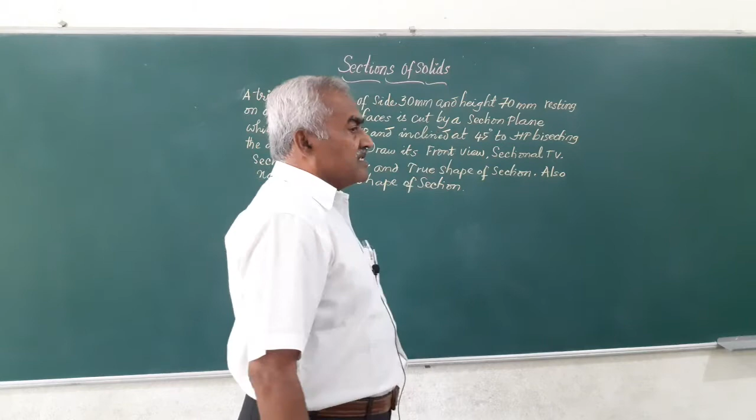So friends, in today's session I am going to explain how to obtain the section of a triangular prism. Basically in the sections of solids, you need to know exactly how to place the object initially. That is very important. Generally, when you do not place the object properly with respect to VP and HP, you do not get any marks at all. So you should first of all learn how to place the object.

In general, whenever any of these prisms are placed on HP, one of the sides, the shorter side, is kept perpendicular to VP, such that this side comes to your left hand side or a corner comes to your right, or it could be placed this way also depending on the problem.

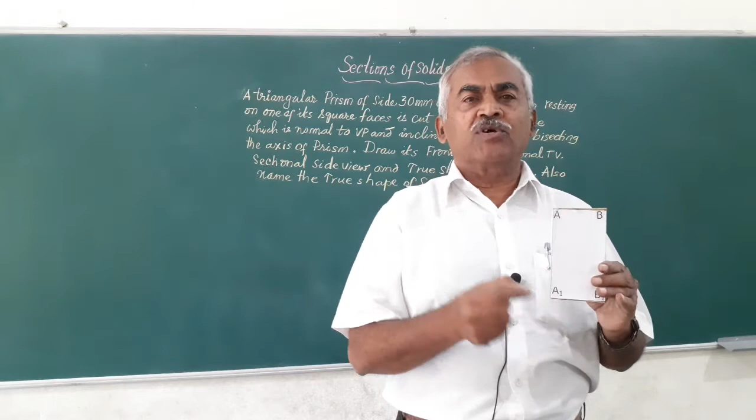So friends, before I take up the actual problem, let me explain about this triangular prism. In a triangular prism, as the name indicates, it has two triangular faces, one at the top and one at the bottom, and they will give you the size of this. Remember, in a triangular prism, these two are equilateral triangles. The center of the top face and the bottom face, one is called O, the other O1, and the imaginary line connecting these two is called the axis of the solid.

Friends, any prism is surrounded on its lateral surface by a number of rectangles. A triangular prism will have 3 rectangular faces on its lateral surface, and the side of that rectangle will be the side of the triangle, while the height is given by the height of the axis or height of the solid. Similarly, a square prism will have a square top, a square bottom, surrounded by 4 rectangles. A pentagon will have 5 rectangles, a hexagon 6 rectangles, and so on.

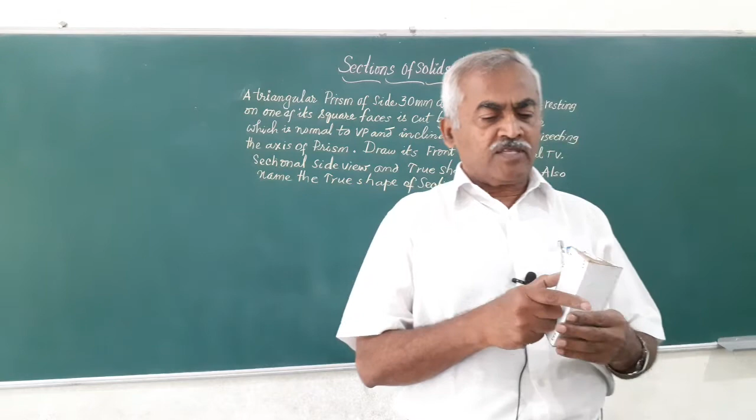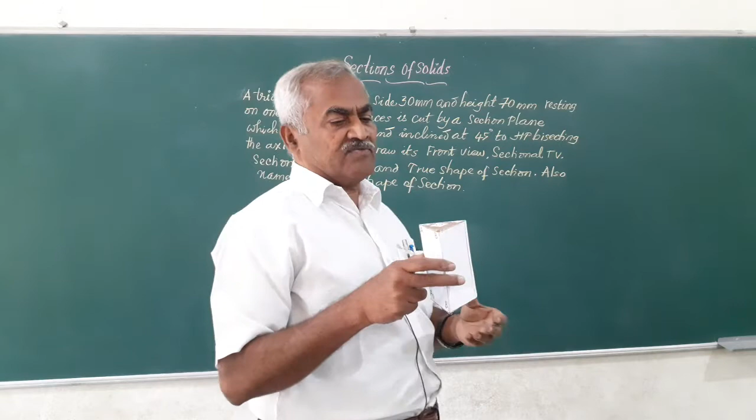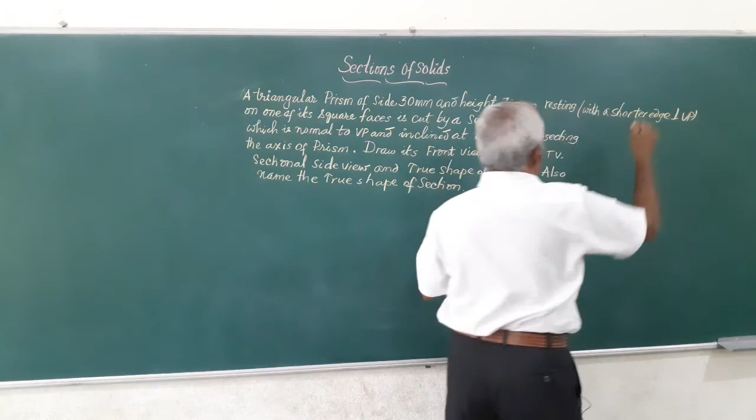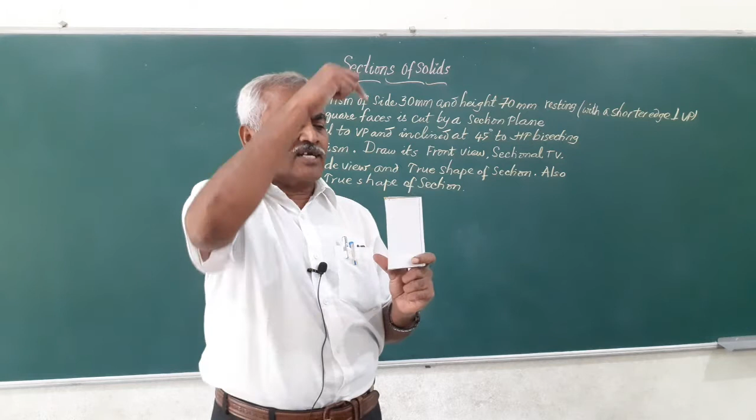So friends, let us see what happens when this is cut by a section plane. Basically you have to keep the object such that one of the shorter edges is perpendicular to VP, and obtain its top view and front view. In the top view you see an equilateral triangle of side 30 mm, and in the front view you will see this rectangle. The bottom triangular face is covered by the top face, so you only see one triangle in the top view.

Now friends, it is cut by a section plane, all these details are given. So let me start this problem by drawing the initial front and top views of the solid.

Let me draw to start with the initial position of the solid. I just mark this xy line representing the intersection of VP and HP. So I will mark it as xy, the line of intersection of VP and HP, and write VP over HP, indicating the first angle projection. So I am solving this problem using first angle projection.

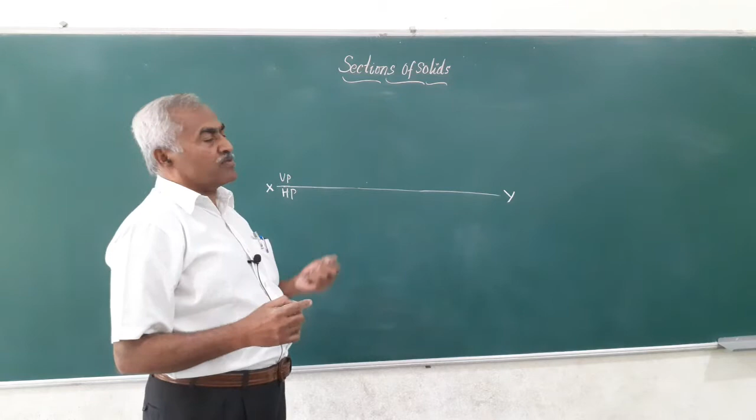Friends, they have given us a triangular prism, and the side is also given to us, so the side of this is 30 mm, and we can just mark it. All the sides are 30 mm. I will just mark it as A, B, C, and I locate the center by bisecting any two adjacent sides like this. You get O, the center of the top face, and O1, the center of the bottom face.

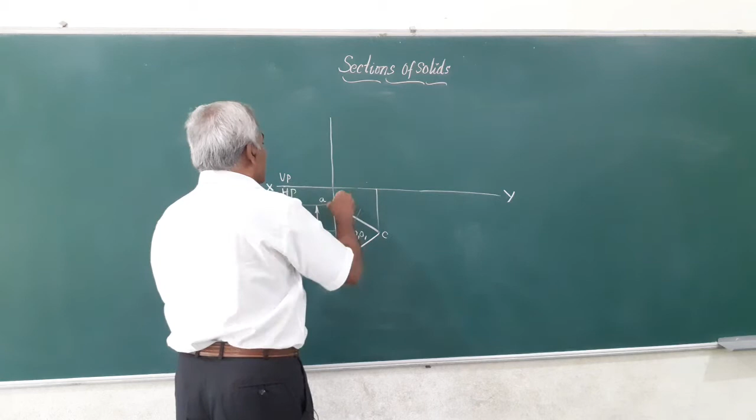Friends, from here in the front view I showed you, you are getting a rectangle, so I will just draw a rectangle here. The height of this rectangle is equal to 70 mm. So I have drawn the front view and top view of the triangular prism, in which one of the shorter sides is perpendicular to VP, and I have got the front view and top view of this solid.

So this is O dash and O1 dash, the center of the top and bottom faces. Let me see how to mark them. Friends, marking is also very important, and if you go wrong in marking, you will not be able to get the section points properly.

So friends, I will just start with marking A, B, C, the three sides. After marking in the top view, I go to the front view and mark this corner as A dash, B dash, and this is C dash. So A, B, C, A dash, B dash, C dash. Similarly, for the bottom face, mark this as A1 dash, B1 dash, C1 dash. Then coming back, these will be the longer edges AA1, BB1, and CC1. Friends, we have marked all the corners and the heights of this object.

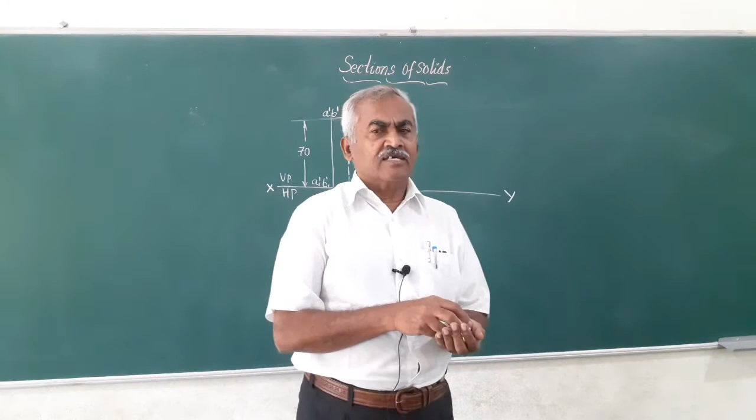Now it is resting with one of the sides AB perpendicular to VP. And now we have to mark the cutting plane or section plane. The question says the solid in this position is cut by a section plane which is normal to VP, meaning perpendicular to the board, bisecting the axis, meaning it divides this axis, which has a height of 70 mm, into two equal parts. So this is going to be 35 mm, 70 by 2. And the section plane should pass through this, cutting the solid.

So I am going to draw a line here, passing through this point, inclined at an angle of 45 degrees to the horizontal. So this is how I mark the section plane SS. Friends, this is making an angle of 45 degrees with the XY line or with the HP. After marking, whatever procedure I am telling, it has to be followed in the same way.

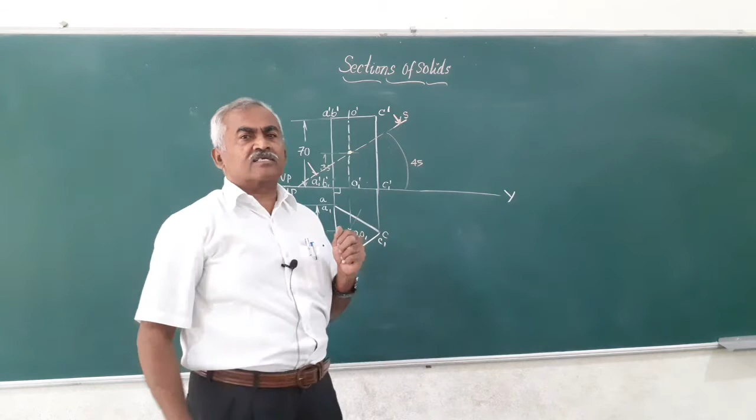After getting this, let us see what portion of the solid is thrown out. Once the solid is cut into two parts, the upper part is thrown out and you are left with only the part below the section plane. So I am going to darken the part that is retained for the purpose of the section, shown in color.

Friends, let us see which points the solid is cut by the section plane SS, which is bisecting the axis of the solid, cutting the two longer edges AA and BB at this point. CC is cut at this point. Now we have to obtain all these points in the top view to get the sectional top view. This longer edge is AA and also BB, so both are cut here, giving you a point for A and a point for BB. And the same line for the CC longer edge gives one more point.

After obtaining these points, whatever points you have got, you have to name them either in clockwise or anti-clockwise order. So I am going to mark this as 1, this as 2, and this as 3. After marking here, go to the front view. This is 1, 2, and this is 3. They should tally.

Friends, after joining all this by straight lines, I am going to hatch or section 1, 2, 3 by lines drawn at an angle of 45 degrees to the horizontal, providing a spacing of around 2 millimeters. So friends, here we have got a sectioned part in the top view, and we call this the sectional top view, because we have sectioned the top view here.

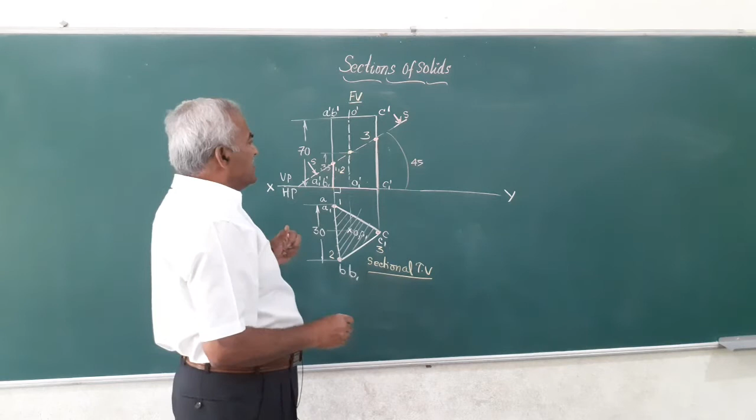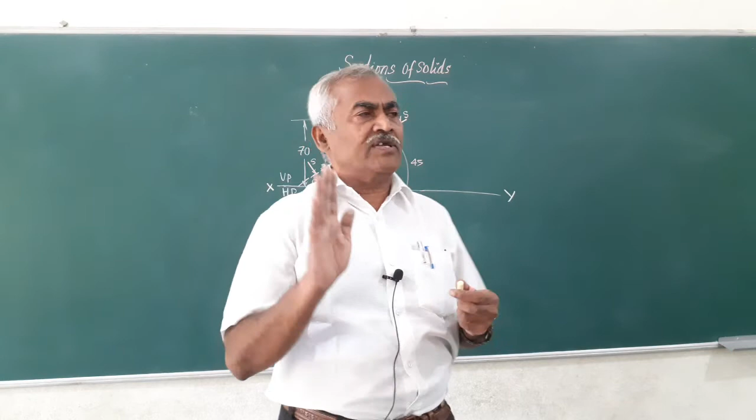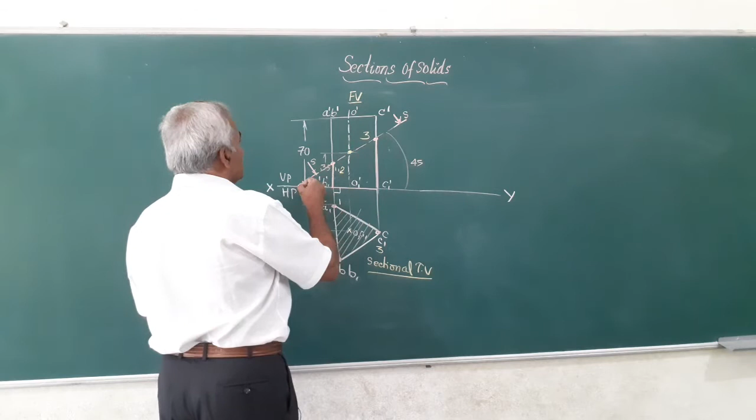Now friends, after these two, we have to obtain the true shape of the section. What is the meaning of true shape of the section? It is nothing but a photocopy of this cut section, or a mirror image of this section. What is to be done for that? It is very simple: we are going to draw a line parallel to SS at any convenient distance, depending on the place available. So friends, I am going to draw a line here.

This line is parallel to SS, and I am going to draw perpendiculars from all these points, point 1, point 2 and point 3. So I am going to draw another line to this point. These lines are parallel, and this is perpendicular to that I have drawn. Now I want to see how the cut portion of this prism looks when it is mirrored parallel to the surface. The mirror image is itself the true shape.

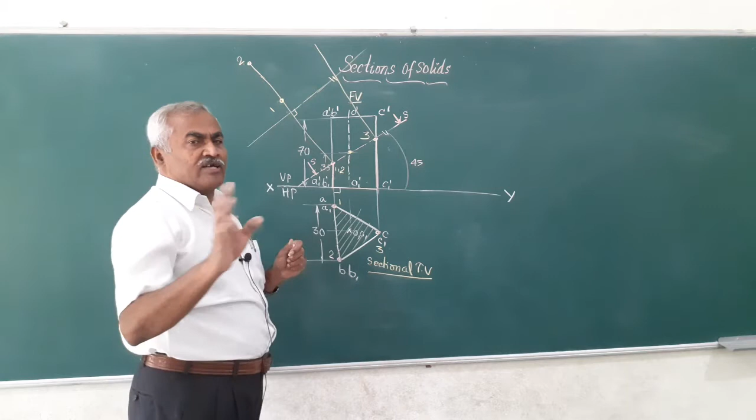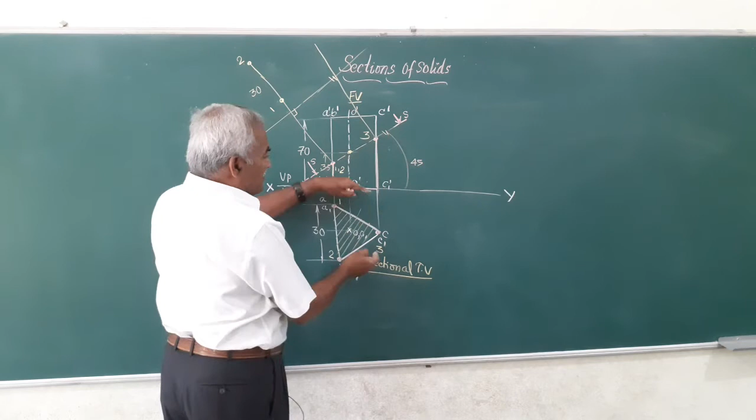Friends, for obtaining points 1, 2, 3 here, I should take the distance of point 1 from XY to this one, and transfer it here. So this distance I have marked here is this distance. Then the same XY distance to this gives point 2. So obviously, this is point 1, this is point 2, and the distance between 1 and 2 is obviously 30 mm. After obtaining this, let us obtain point 3. This point 3 lies here, so we have to measure the distance of point 3 from XY and mark it.

Friends, you are going to get it here. Say that is point 3. So 3 points you have got. Join all those points by a straight line.

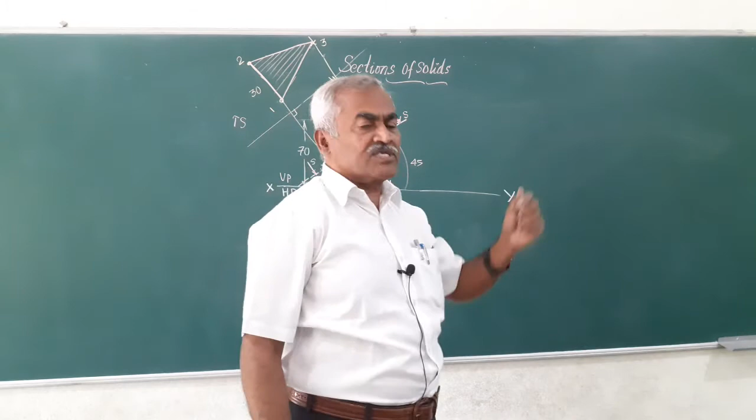I have joined this by a straight line and I have to hatch it at an angle of 45 degrees to the horizontal. This part will give you the true shape of the section. TS stands for the true shape of the section. Friends, they have also asked you the question: what is the name of the true shape?

Friends, this true shape has got a dimension of 30 here. It is a 3-sided figure, so it's obviously a triangle, and this triangle is an isosceles triangle because this has got this height, base is this much, height is this much. Also remember, whatever height we get here is equal to this, whatever dimension is equal to that, and whatever dimension 1 to 2 you have got is the same. If you remember that, it will help you to solve some more problems.

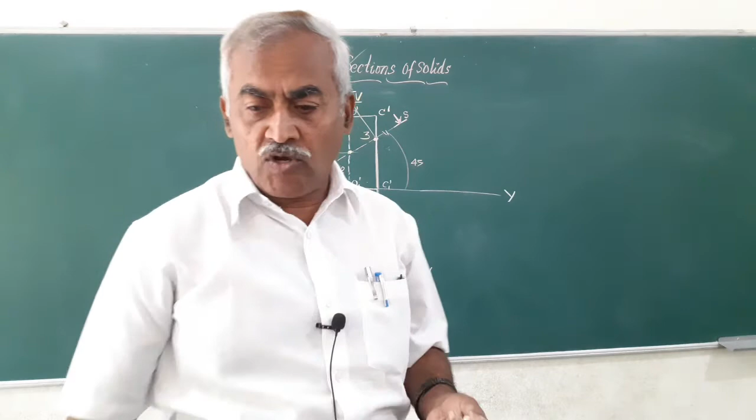Since we have obtained the sectional top view and the front view, now we need to obtain how it looks in the side view, that is, how the section part of the solid looks in the side view, or end view, or profile view. Friends, here I am going to draw a line.

I will call this x1 y1. This line is xy, and this is the side view or left hand view of the solid, or left profile view of the solid, assuming that the solid is not cut by any section plane.

For that, I am going to draw a line here at an angle of 45 degrees and transfer all these points to obtain the side view. How to obtain it is very simple.

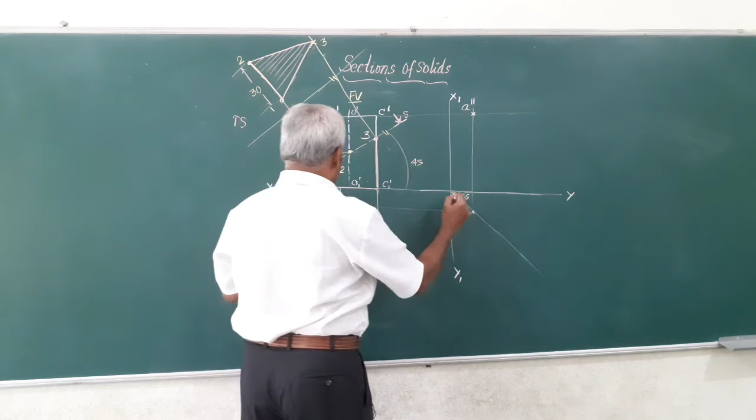Let us start with the edge AA. From AA, draw a horizontal line. It will meet here, project upward, so from that place you get a horizontal line. This is going to be A, so in the side view you show it as A double dash, and for the bottom part we call it A1 double dash. We put double prime for all the end views in the side view.

On the same lines, friends, obtain BB. Follow the same procedure and you will get this point B double dash, and this is B1 double dash. So these are the edges.

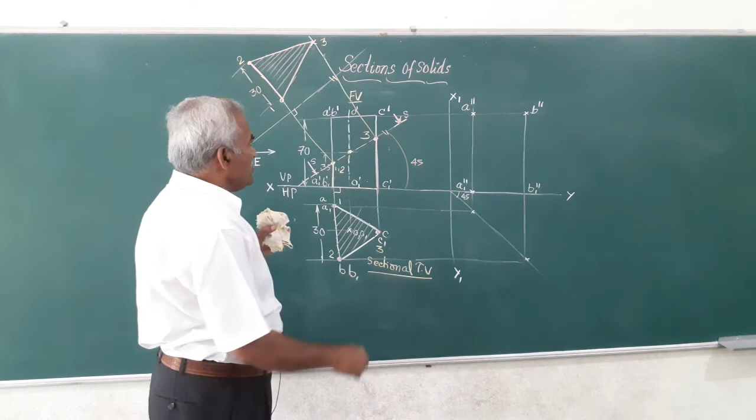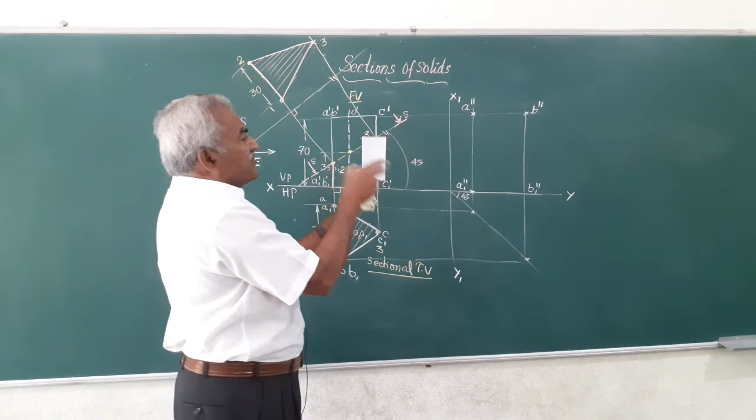Similarly, friends, when you are looking from the left end to obtain the left hand view, consider edge CC of the solid - you are keeping the object like this. When you look from this side, this particular edge, which is behind this rectangle, is not visible, hence I have to show that by a dotted line. I follow the same procedure, obtain the edge, and show it by a thin or dotted line. So friends, this is the top face, this is C double dash and C1 double dash.

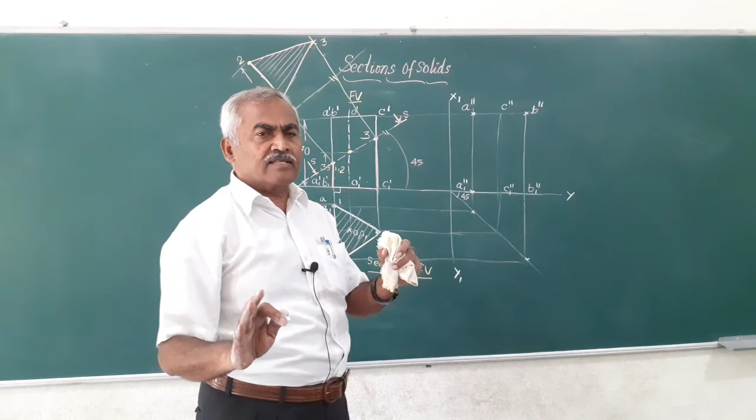This is the left hand view of the solid without the section plane, that is, we are assuming it is not cut till now.

So friends, after obtaining this end view of the triangular prism, we transfer all these points 1, 2, 3 from the vertical edges A dash, A1 dash, B dash, B1 dash to the corresponding points in the end view. That is, starting with point 1, which is on AA, I take a horizontal line till AA and get a point here. That point is 1.

Friends, on BB you want to extend that till BB, so this is point 2. And friends, point 3 is on CC - extend that till there and we get this point. That point is going to be 3. So point 1, point 2, point 3.

Join all these by straight lines for all the prisms and pyramids, including the cubes and tetrahedrons. So I am going to join by straight line and get this - this is the section part, how it is in the view. I am going to hatch it by lines inclined at an angle of 45 degrees to the horizontal.

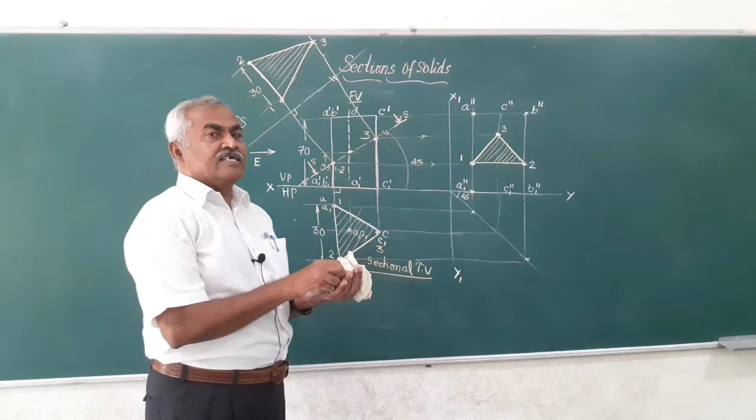After getting this, let's see which portion of the solid is retained in the end view. Friends, just look at the front view. In the front view, the portion from 1 to A1, this colored portion, is retained, so I am going to show it. This height is equal to this.

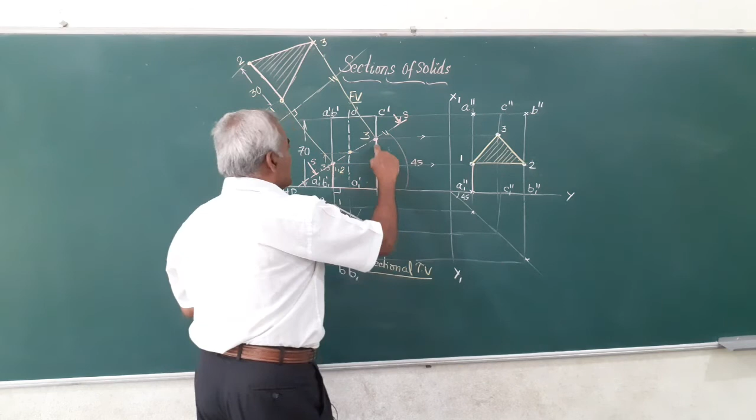Similarly, this height from 3 to C is also there, but that is not visible, so show it by a dotted line. Finally, 2 to B1 is also available, and the bottom portion of the prism is not touched by the section plane, hence you have to retain that.